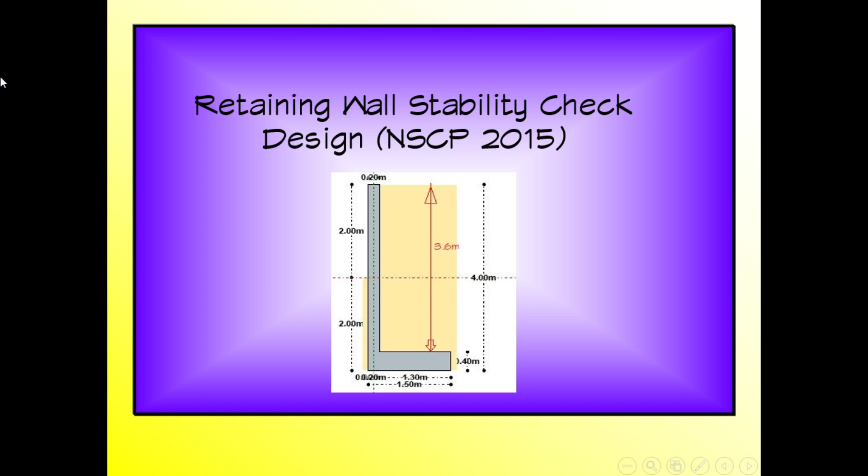Base dito sa figure, ito ang project information niya. Ang wall height niya is 3.6 meters. Ito yon, simula dito sa top of the footing. Tapos, ang concrete strength niya, 20.7 megapascal, which is 3,000 psi. Rebar yield strength, yung fy niya is grade 40, 276 megapascal. Soil density niya is 18 kilonewton per cubic meter.

Ang soil bearing capacity niya is 150 kPa. Friction angle niya is 30 degrees. Wall thickness, bottom and above is 0.2 or 20 cm. Footing thickness naman is 0.4 meter. Heel length ito is 1.3. Toe length, yung toe, wala siya kasi boundary siya eh. Public property, private property. Surcharge load niya 10 kPa dito yon, kasi may mga dadaan tong sasakyan. So, inassume na lang natin na 10 kPa.

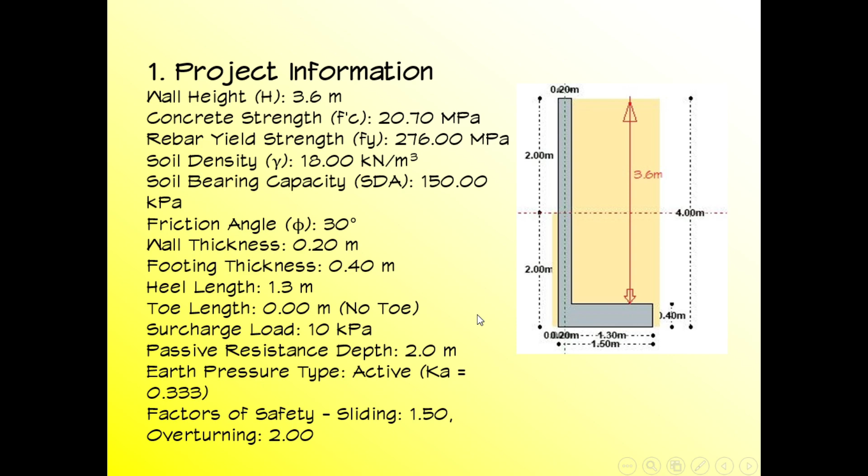Yung passive resistance naman, depth ito yon, 2 meters. Earth pressure type, active. Active yung classification ng retaining wall na gagawin natin. Factor of safety, sliding is 1.5 and overturning is 2.0. Ito, meron tayong earth pressure calculation, active condition. So, ginawa natin ang computation base sa active condition, yung assumption natin.

So, itong formula, Ka is equals to 1 minus sin phi all over 1 plus sin phi, yung Ka. I-substitute lang natin yung mga values dito. Yung phi, 30 degrees. So, naka-arrive tayo ng 0.333 sa Ka. Itong formula, Pa sa active, yung pressure, 1/2 times Ka times density ng soil times H squared, yung total height ng wall. Substitute ulit, 0.5 times 0.333, yung Ka, times 18, times 3.6 squared. So, nakakuha tayo ng 38.66 kilonewton per meter.

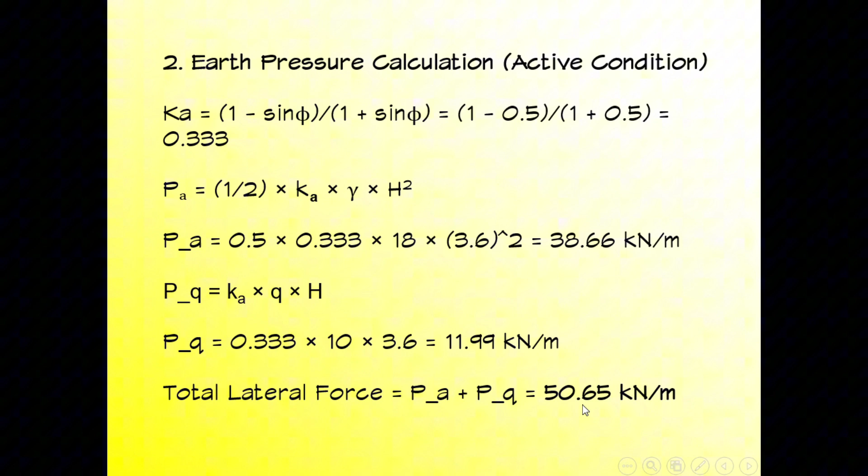So, ang Pq naman, Ka times q times H. Substitute lang natin, 0.333, yung Ka, times 10, yung surcharge load. So, nakakuha tayo ng 11.99 kilonewton per meter. Sum up lang natin yung lateral forces, yung Pa plus Pq is equivalent to 50.65 kilonewton per meter.

So, check natin yung sliding. Calculate resisting force due to wall weight and friction. Assume natin ang width ng wall is 1 meter strip consideration. So, volume of wall, stem plus footing: 0.20 yung thickness, times height ng wall 3.6, times 1 yung width, plus 0.2 times 1.3 times the thickness of the footing. So nakuha natin yung volume is 0.824 cubic meter.

Tapos yung volume of soil on heel is 1.3 times 3.6 times 1. So nakuha natin is 4.68 cubic meter. Ito ang soil na nasa ibabaw ng footing. Yung 1.3 yung haba ng heel, saka taas ng tambak, saka ito yung width ng wall, yung assumption natin na 1 meter strip.

So weight of concrete is 0.824 times 24. Nakuha natin is 19.78 kilonewton. Weight of soil naman, 4.68 times 18 is equivalent to 84.24 kilonewton. Kunin natin total weight, add lang natin lahat. So nakasum up tayo ng 104.02 kilonewton per meter.

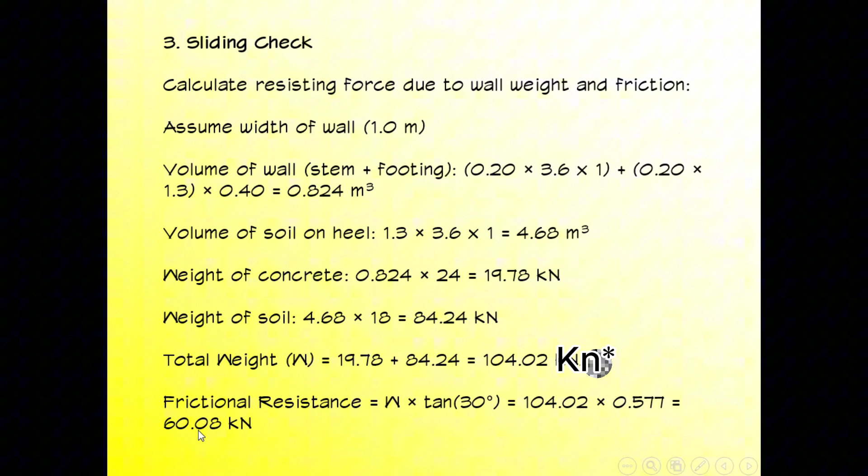So ang frictional resistance niya, ang formula is weight times tangent of 30 degrees. Substitute lang natin itong weight niya, then yung tangent theta is 0.577, equals to 60.08 kilonewton. Including passive resistance na 2 meters depth, substitute lang natin: passive resistance, 1/2 times 3, yung passive constant niya, times 18 times 2 squared.

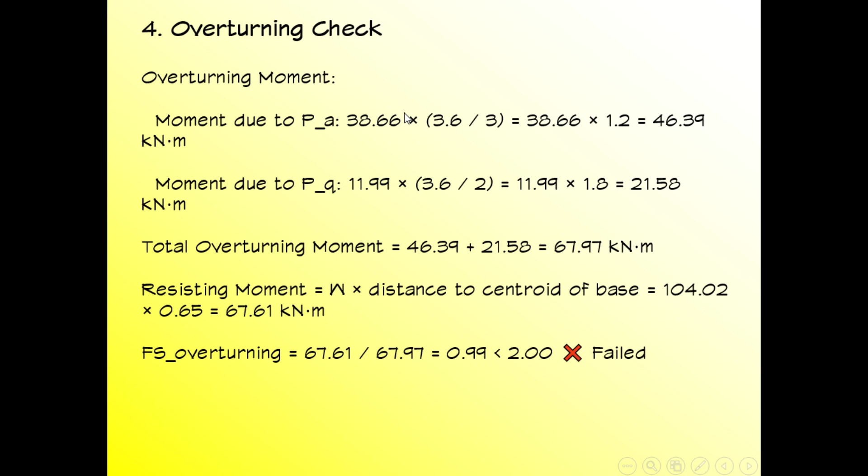Bearing pressure check naman, net moment equals to resisting moment minus overturning moment is equals to 67.61 minus 67.97, so equals to negative 0.36 kilonewton meter. Kumbaga yung difference lang niya ito. Eccentricity naman is 0.36 divided by 104.02 equals to 0.0035. So base width is 1.3 meters. So base divided by 6. So substitute lang natin, 1.3 divided by 6 equals to 0.217 meter. So since E is less than B over 6, no tension zone under base.